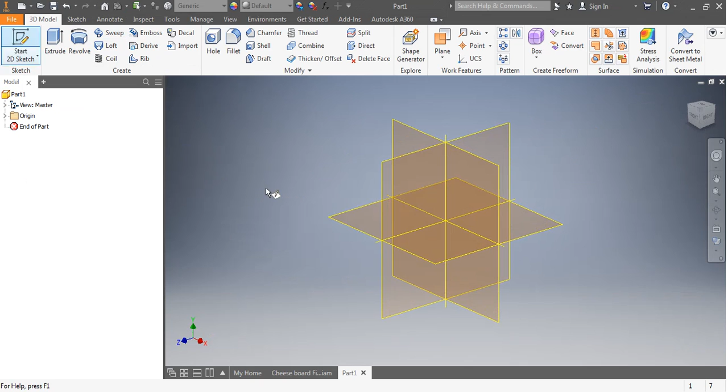To start off, we go to Part, Start 2D Sketch, click on the top plane, and do a rectangle. Always do a center 2-point rectangle, starting at the center - it really helps you out later on. Dimension it and set this to 15 inches, which you can modify to suit your needs, and set this one to 1.25. So there's our first part.

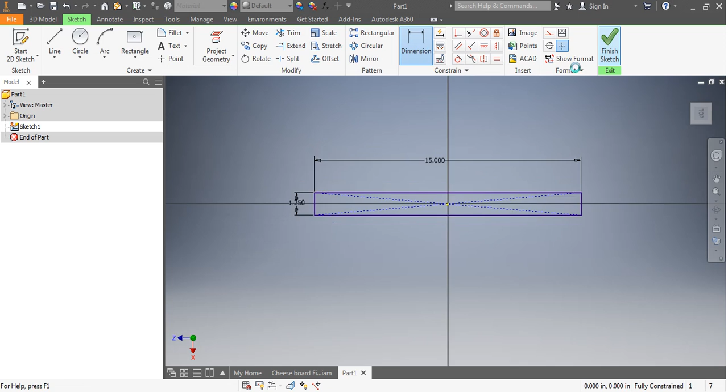Click Finish, and I'm doing the middle one as I said. Extrude it - it always extrudes up to 3/4 of an inch, so we'll put 3/4 in there. Click OK, and then I click on the part and come up to my different materials.

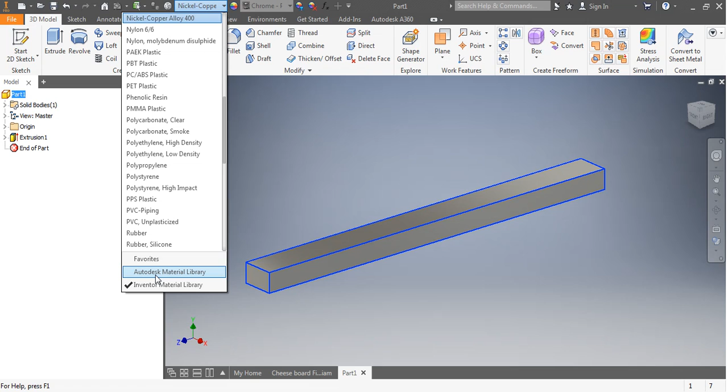It's set to Inventor Materials - whoops, I didn't want nickel, sorry about that, let me try again, and I'll type M for maple. Oh, maybe not - there is no maple, so we need to switch libraries. I'll go to Autodesk Material Library, and in here type M for maple. There it is, and we'll click it to set maple.

Now that's my part, and if you look you can see the grain is running the wrong way as usual, so you've got to zoom out a tiny bit and click on Adjust. From Adjust, I'll simply rotate it so the grain is running the correct way, then OK, and there's my first part, which I'll save.

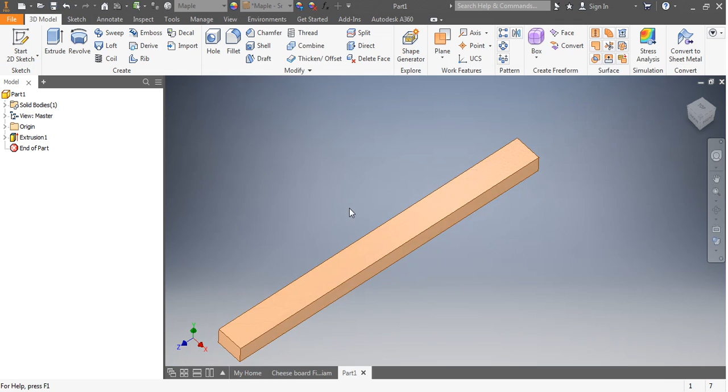I'll go to Save, come up here, and make a new folder called Cheese Platter. From Cheese Platter, we double click, and I'm going to call this Middle Maple.

Click Save. Now when I go back here, this piece is just a little bit thicker, so why start a whole new piece? We go File, Save As, Save Copy As, and I'll save this one as Outside Maple. Click Save.

The first thing I'm going to do is go back and edit the part - actually no, if you look, this is Middle Maple, I don't want that. I want to open my outside part, so I go up one, up again, and find my folder, Woodwork 9, and there's Cheese Platter - I think I spelled it wrong. We're going Outside Maple, and click on it.

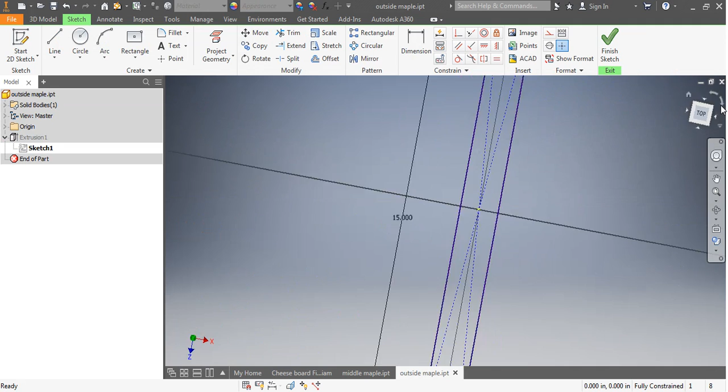Now I go into the sketch, change this number, rotate this, and change this to 2 - so it's a little bit wider. Click Finish Sketch, and save this right away. So now I've got my middle piece and my outside piece.

Now I'll go do my walnut - actually no, I'll do my middle maple piece. I go back to one of these, File, Save As a copy, and call this one Inner Maple - probably should call it 1/2 inch maple, but I'll call it Inner Maple. Click Save, then open it right away.

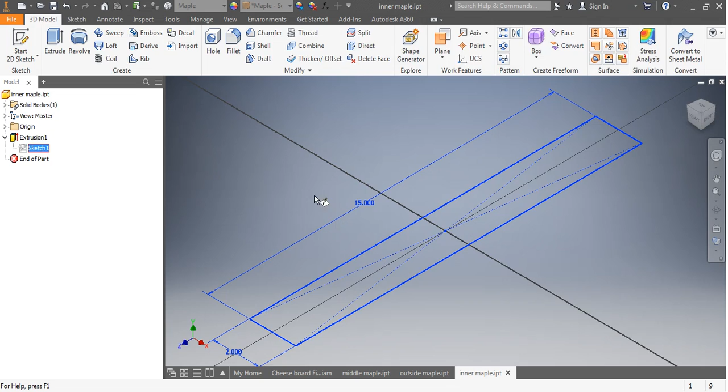Once it's open, Inner Maple, I go Edit right away, and again rotate this around so it's easier. I know that this one is 0.5, or I can type in 1/2 inch. Hit Finish Sketch - it goes skinny - and save it. So now I have that maple piece, that maple piece, that maple piece.

So now I'm going to Black Walnut - I'll grab this small one and go File, Save As, and call this one Inner Black Walnut, or Inner Walnut. I'll just move that one, click Save, and once again open it up - go Open, Inner Walnut. You can see it hasn't changed colors.

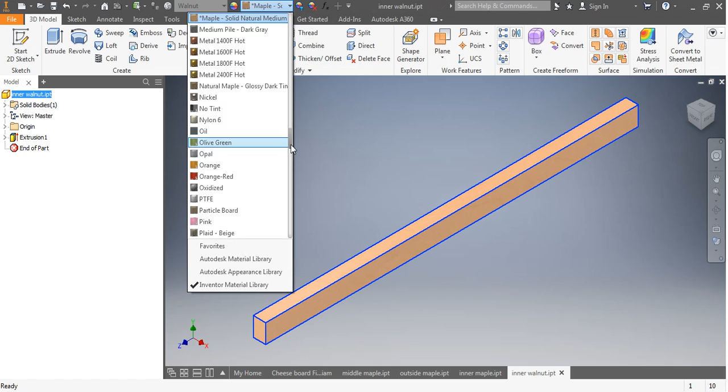So go click and type W for walnut - oops, I just did water by accident, let's try that one more time. We'll do walnut, there we go. See how it doesn't change? Sometimes we have to come up to the top and clear what's called the override - there's the override, there's maple, and we'll save it as Inner Walnut.

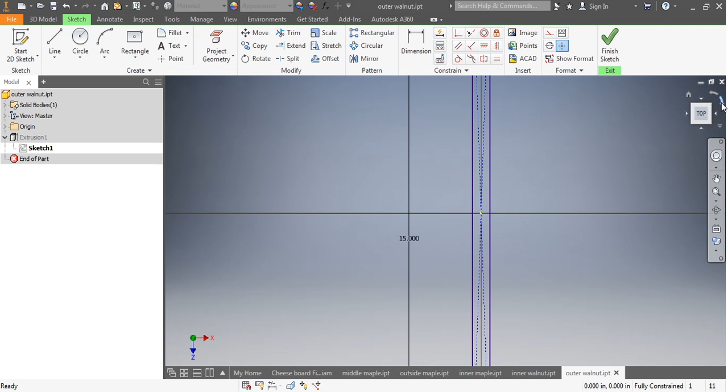The last one we'll do is the really skinny piece, let's call it Outer Walnut. Go back to Inner Walnut, File, Save As, and call this Outer Walnut, and save it. Open it and find Outer Walnut - it's a bit wide, so go back to sketch and edit this to 1/4 inch. You could make it an eighth of an inch, it doesn't really matter, it's up to you. Click OK, finish it, and finally save.

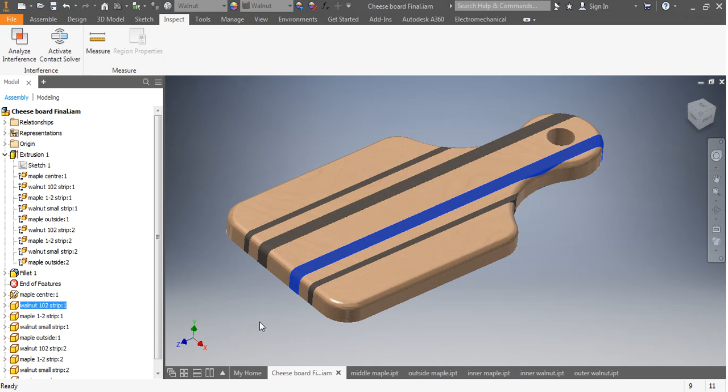So if we look at this now, there's my cheese board, there's all my different pieces. I guess I used a different color versus walnut - what did I actually use here? If I click it, no, I used walnut. So now there's my middle piece, my outside piece, my inner, walnut - that completes all the different pieces.

In the next tutorial, I will assemble it all and show you how to do that, and then eventually cut out the shape. And that concludes this tutorial.